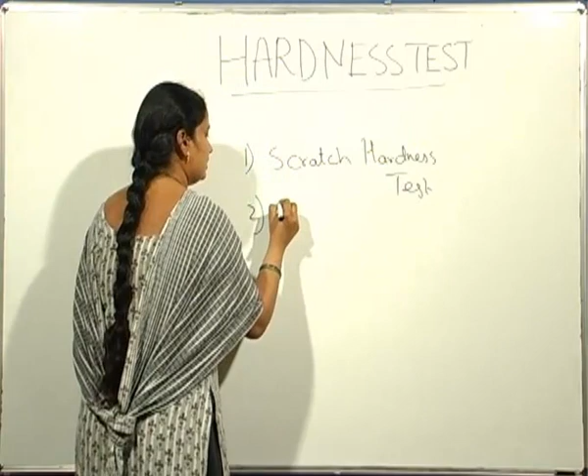Among these, there are three types of hardness measurements. The first is the oldest type, scratch hardness test. Second is rebound hardness test. Third is indentation hardness test, where an indenter having either a spherical shape, or in the form of a cone or pyramid, tries to indent on the surface of the material under the application of a known load.

The depth of the indentation or the dimensions of the indentation is measured, and that corresponds to the hardness. Various examples of indentation hardness tests are Brinell hardness, Rockwell hardness, Vickers hardness, etc.

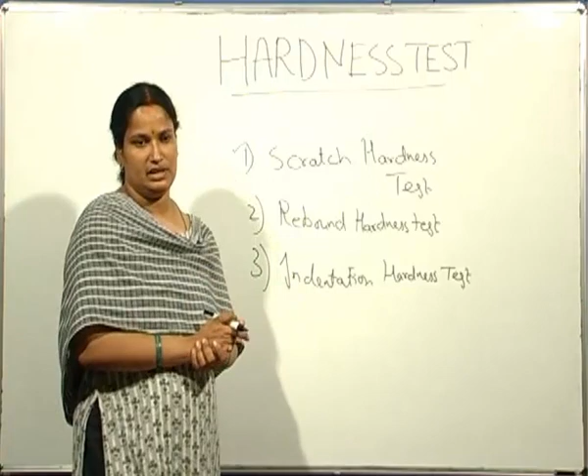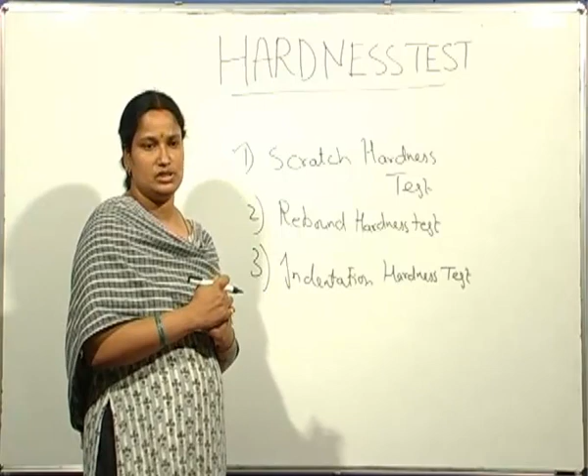Before going into detail on the various types of hardness, first we look into the oldest method of determining hardness, known as scratch hardness test. It is the ability of a material to scratch another material. If a material is very hard, it resists scratching; a softer material shows less resistance to scratching. This scratch hardness test is more useful for mineralogists compared to material scientists.

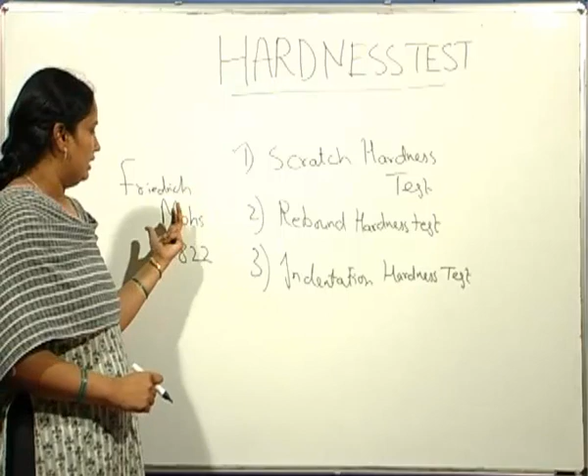This was first devised by a German mineralogist known as Friedrich Mohs, in the year 1822. He devised this scratch hardness test depending upon the ability of a material to scratch another material - a harder material scratches a softer material. Based on this, he devised a scale which has numbers from 1 to 10.

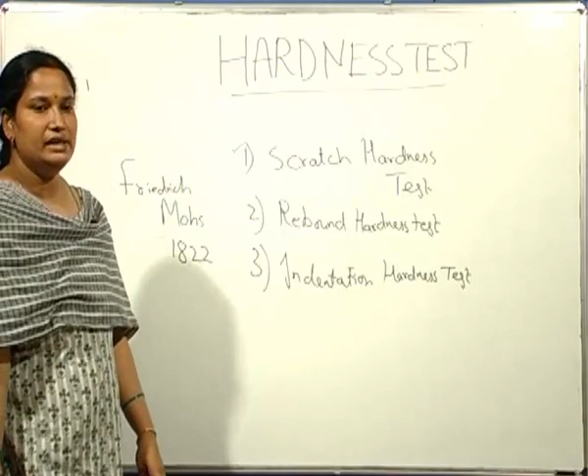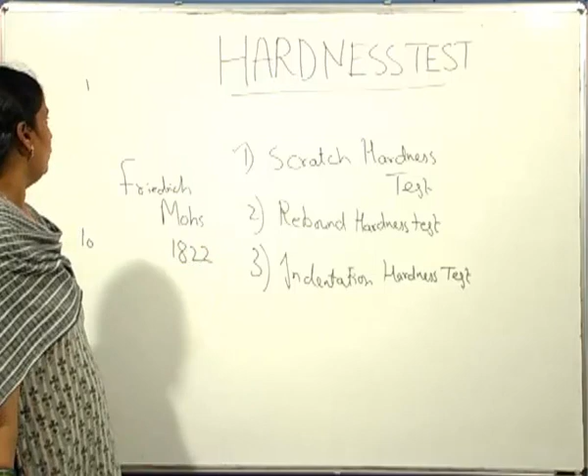The scale is indexed from 1 to 10. 1 stands for the soft materials, and it goes on increasing, and 10 is for the hard materials. So 1 stands for talc, 2 stands for gypsum, 3 calcite, 4 fluorite, 5 apatite, 6 feldspar, 7 quartz, 8 topaz, 9 corundum, and 10 diamond.

This is the hardest known material to man. These are the different ranks depending upon the ability to scratch another material. So the softest is talc, ranked 1, then 2 gypsum, 3 calcite, 4 fluorite, 5 apatite, 6 feldspar, 7 quartz, 8 topaz, 9 corundum, and 10 diamond. These are the various minerals placed in this scale depending upon the ability to scratch.

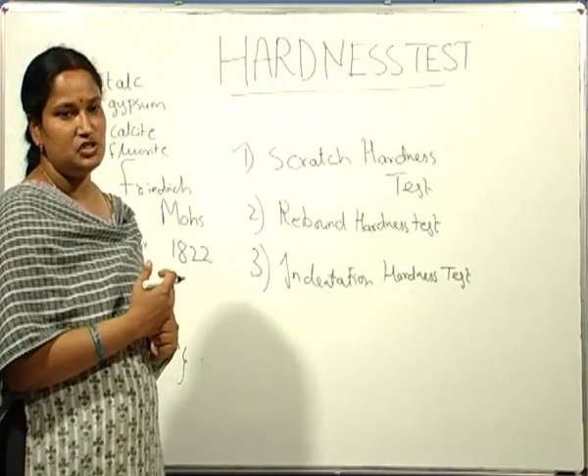But one disadvantage of this Mohs scale is that the intervals are not widely and equally spaced. For example, the interval between 9 to 10 is very high compared to 1 and 2. The gap between 9 and 10 is much wider when compared to 1 and 2. So for the case of metals, this is of limited usefulness, because it is more qualitative in nature, and the intervals are not equally and widely spaced.

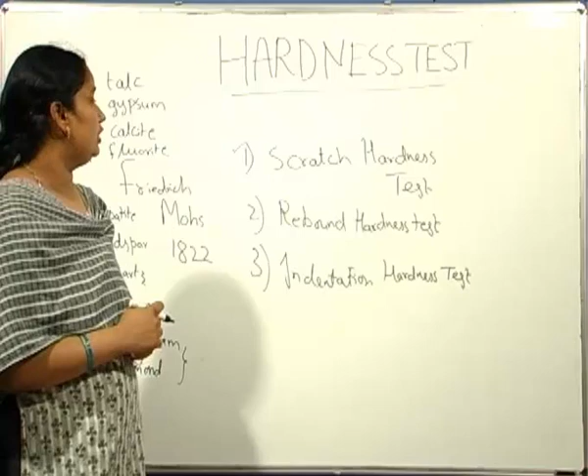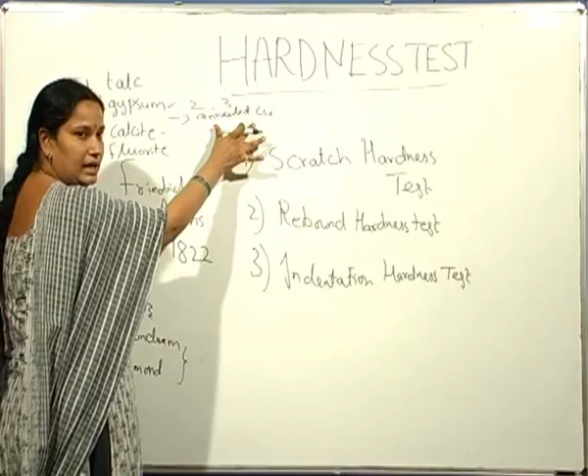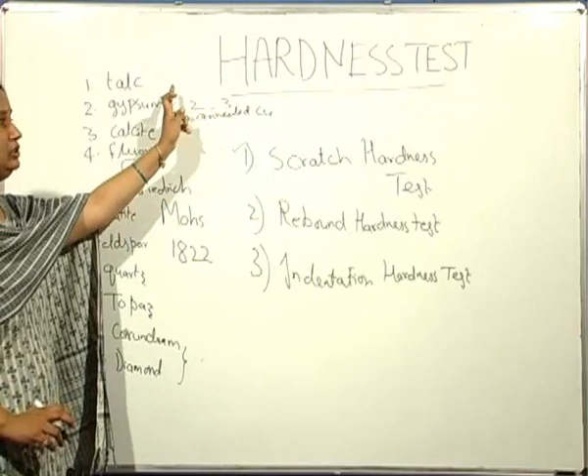For the case of annealed copper, it falls between 2 and 3. If a test material, say annealed copper, is able to scratch gypsum but unable to scratch calcite, it is placed between these 2 points, between 2 and 3. This indicates that the test material is able to scratch rank 2, that is gypsum, but unable to scratch rank 3, that is calcite. So it is placed between 2 points: the first point indicating that the test material is able to scratch that mineral, whereas it is unable to scratch the next mineral.

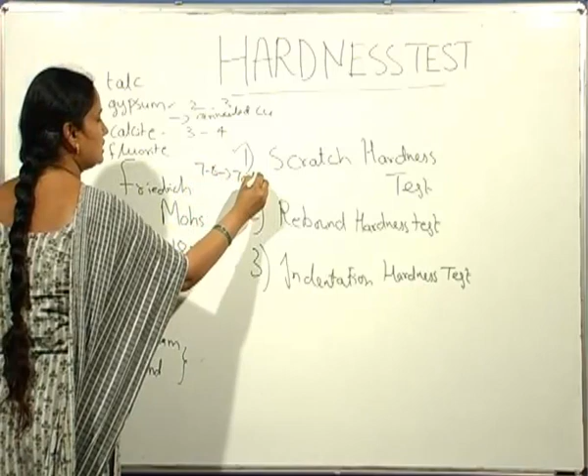For the case of iron with 0.1 weight% carbon, it falls between 3 and 4. For tool steel, it is between 7 and 8. So a material with the lowest rank cannot scratch a material with a higher rank. This means quartz cannot scratch topaz, because topaz is harder and of higher rank, whereas quartz can scratch feldspar. So this is how minerals are ranked in the Mohs scale depending upon the ability to scratch.

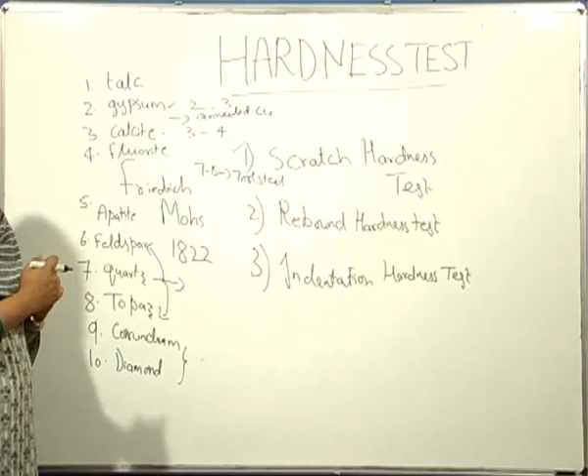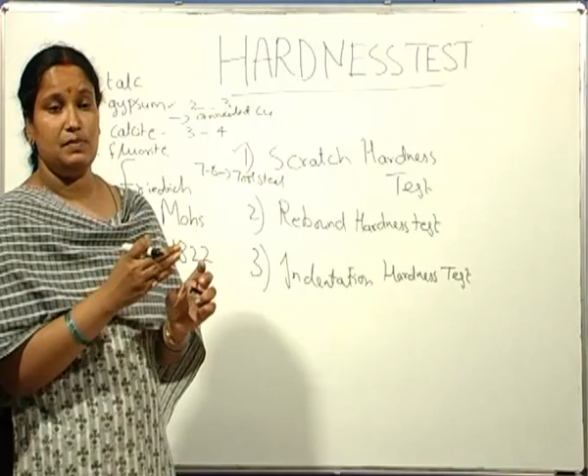This is known as the scratch hardness test. This test is not widely used for metals, but a form of this test is used for certain applications. For hardened steels, this is known as the file test. A file in a tempered condition has a certain hardness value. If this file scratches the test material, it means the test material is softer than the file. If the file is unable to scratch the test material, it means the test material is harder than the file. So this is used only for comparative purposes, only for comparison between materials. Moreover, this type of test method is more qualitative in nature.

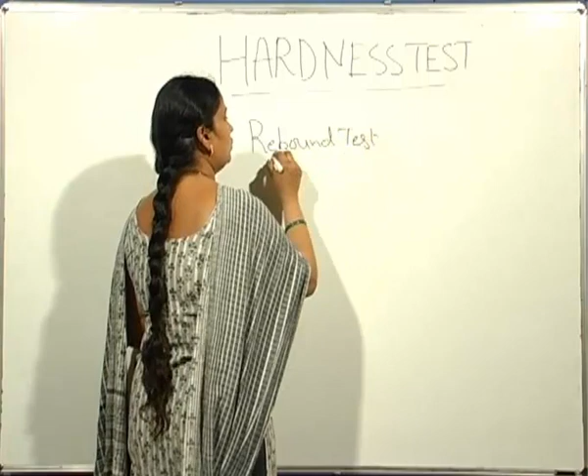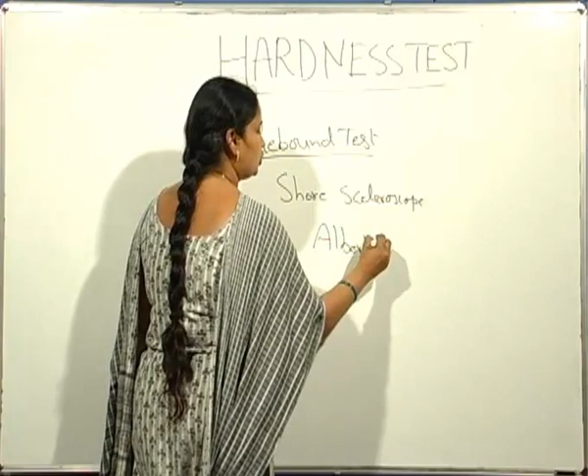The example of this rebound test is the Shore scleroscope, which was invented by a scientist known as Albert F. Shore in the year 1907. This is one of the hardness testing methods which uses the principle of elastic rebound, invented by Albert F. Shore in 1907.

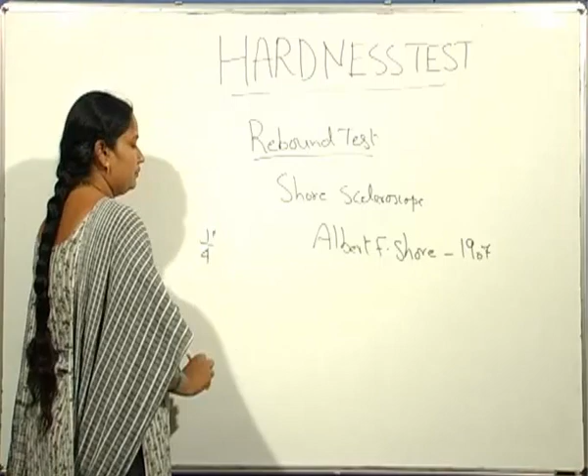This Shore scleroscope uses a diamond tip hammer enclosed in a glass tube. The diamond tip hammer has a diameter of 1/4 inch and a length of about 3/4 inch. The tip radius is about 0.01 inch. This diamond tip hammer, about 1/4 inch diameter and 3/4 inch length, is allowed to fall from a known height.

This hammer falls under its own weight onto the test specimen and rebounds to a height depending upon the hardness of the material. If the material is harder, the height of rebound is higher. If the material is softer, the height of rebound is less.

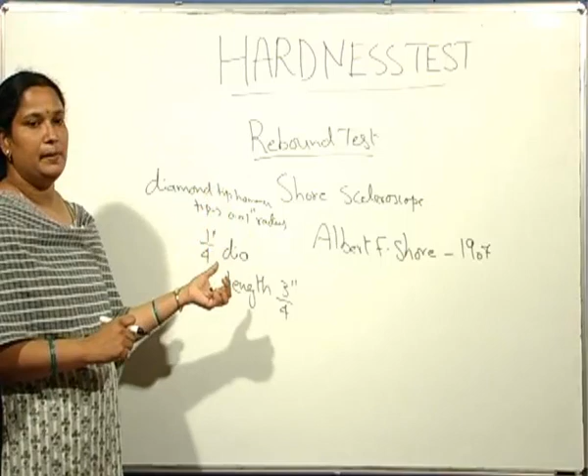This hardness can be determined by means of a scale which is graduated from 0 to 100. The height of rebound is read from the scale as the hardness of the material.

The main application of this Shore scleroscope is that it does not give any impression or mark on the specimen. So for certain applications where impressions or marks cannot be tolerated, this test can be used.

This test is also used to determine the hardness of material which is very large, for large forgings, as well as when a number of quality checks are to be conducted on large samples. One uses this Shore scleroscope test because it is a very rapid way of determining hardness, and it can be used even for very large size specimens and for a number of specimens.

But the hardness cannot be determined from only one rebound; one cannot determine the hardness of the material from a single reading. A number of measurements have to be conducted, with rebounds not on the same place where the hammer strikes the specimen. Once the hammer strikes the sample surface, the material is tested again at the next surface, and the average of these hardness values is taken to get accurate test results.

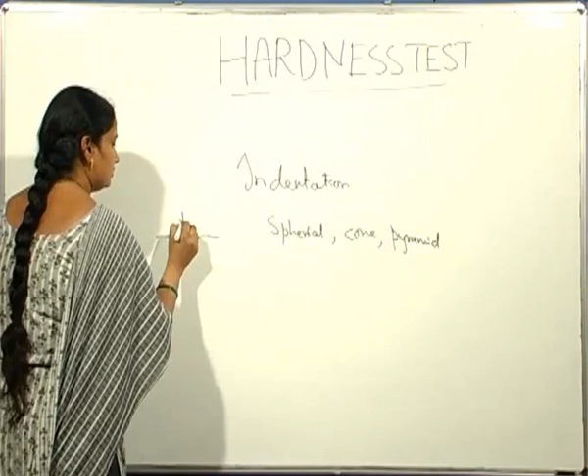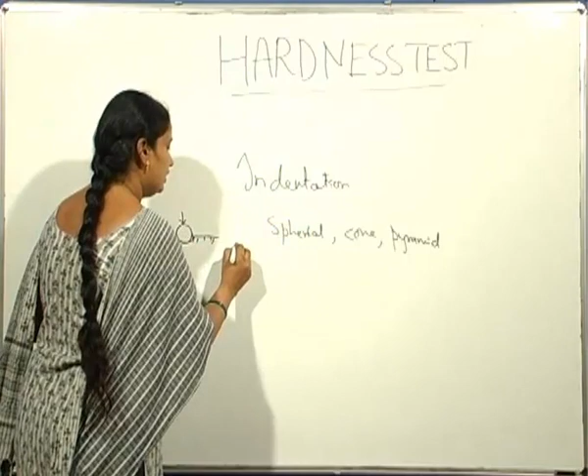This indenter is forced under the application of a known constant load onto the surface of the specimen, making an impression or indentation on the surface. Hardness is determined by the formula: hardness equals load divided by the surface area of indentation or depth of indentation.

In the case of indentation hardness methods, either a spherical, conical, or pyramid shaped indenter is used. This indenter is allowed to indent on the surface of the specimen under a known constant load.

After equilibrium is established, the indenter and load are withdrawn and the dimensions of the indentation are measured. Some hardness tests determine the area of indentation, and some determine the depth of indentation.

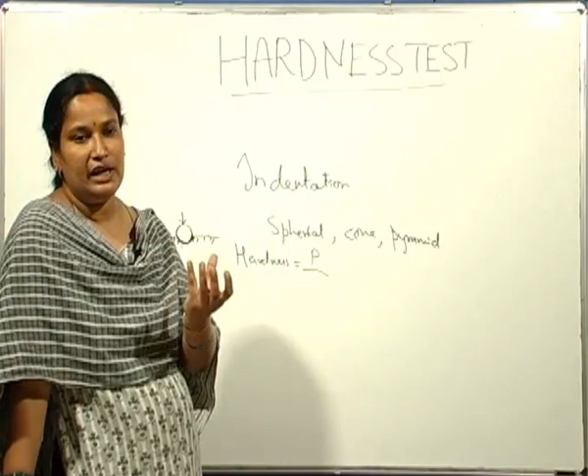In the case of the Rockwell hardness test, it measures the depth of indentation, whereas in the case of Brinell and Vickers, they determine the surface area of the indentation. This is the basic principle of indentation type hardness.

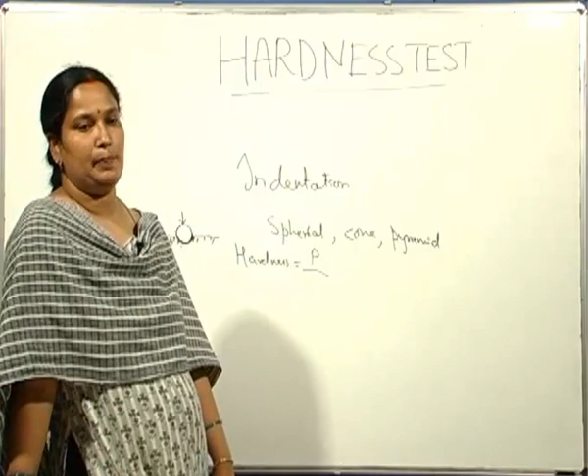The examples of indentation type hardness are Brinell, Vickers, and Rockwell. These are some of the well-established indentation methods to determine the hardness of a material.

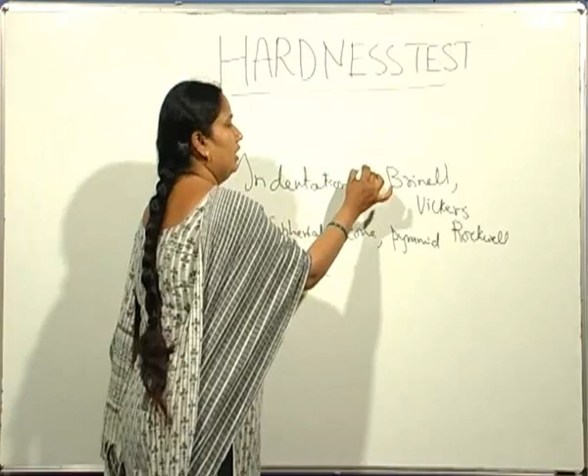Now we shall first see about the Brinell hardness test, which was invented by J.A. Brinell in the year 1900. This Brinell hardness test uses a spherical indenter of diameter 10 mm, a hardened steel ball used as the indenter.

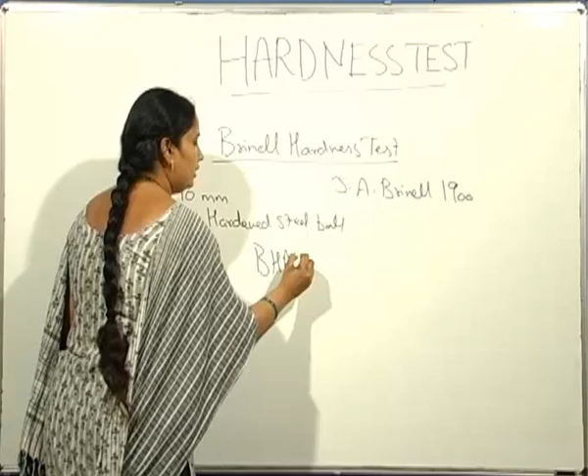This hardened steel ball, under the application of load, indents or makes an impression on the surface of the specimen. Once equilibrium is established, the load and indenter are withdrawn, and the dimensions of the indentation are measured. The Brinell hardness number is given by load divided by the surface area of indentation.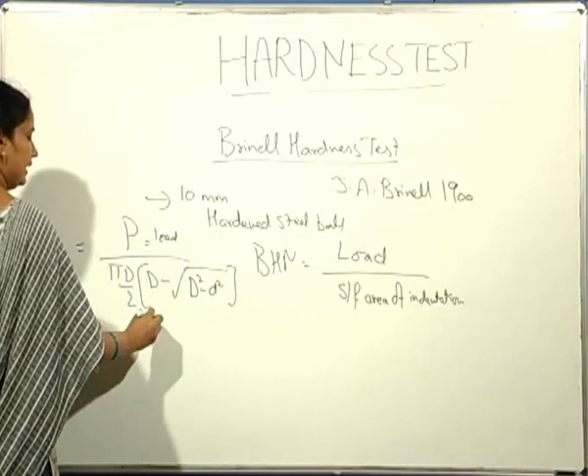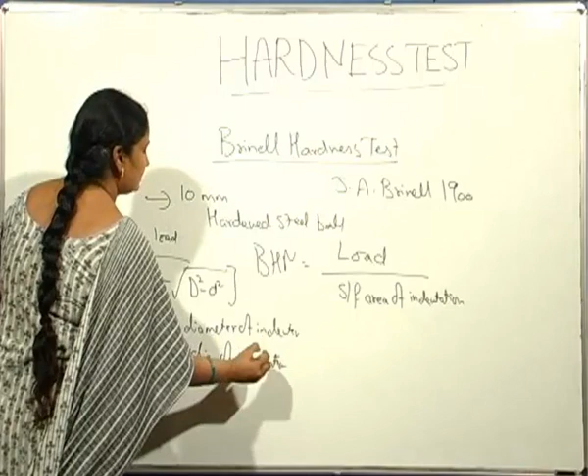Surface area of indentation is given by the formula P divided by pi d by 2 into capital D minus root over D square minus small d square, where P is the load in kgs, capital D is the diameter of indenter, known as 10 mm, and small d is the diameter of indentation. So Brinell hardness has the units of kg per mm square.

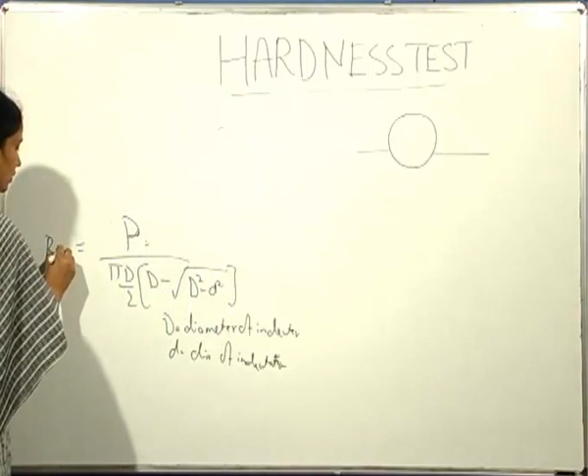In order to derive the formula for Brinell hardness number, which is load divided by the surface area of indentation, BHN equals P divided by pi d by 2 into capital D minus root over D square minus small d square, we consider this figure. This is the diameter of indentation, small d, and this is the diameter of indenter, capital D, this is of height h, and this distance is x.

According to the formula, Brinell hardness number equals load divided by the surface area of indentation, given by pi d h. The surface area of indentation is pi d into h, where h is the depth.

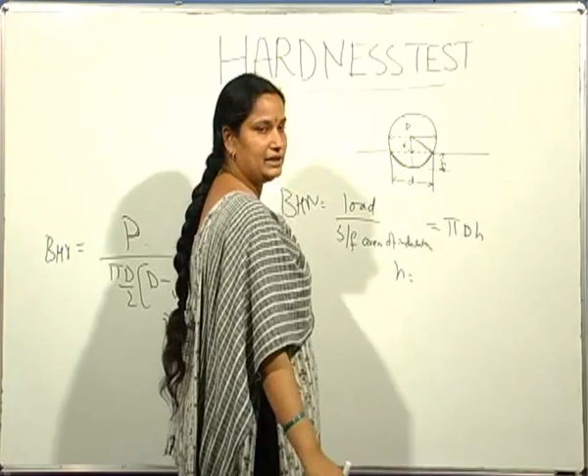So h can be written from this figure. H is equal to capital D by 2 minus x. So h is equal to, from the figure, capital D by 2 minus x equals h.

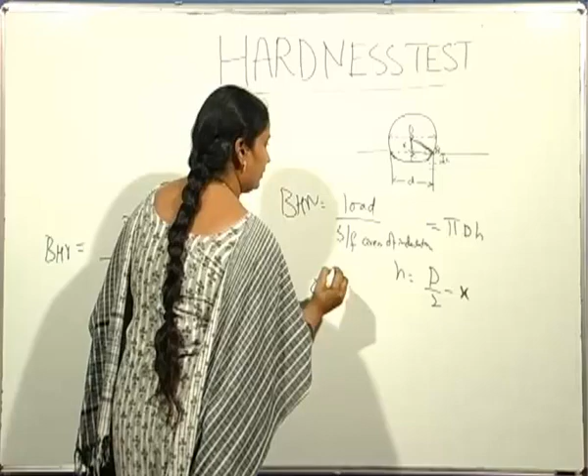By considering this right angle triangle OCB, we have x square plus, this is small d by 2, x square plus d by 2 square is equal to capital D by 2 square. From this, it can be written that x is equal to root over D square minus small d square, by 2.

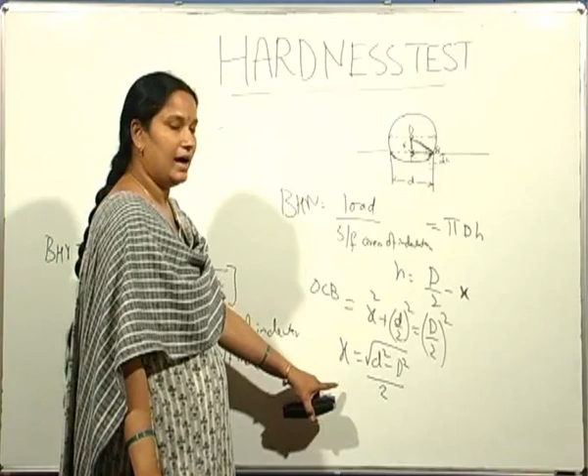This is x. Now substitute the value of x in equation 1. So h is equal to capital D by 2 minus x. X is root over capital D square minus small d square, by 2. This is h. So the surface area of indentation is pi d into h.

So the surface area of indentation, pi d into h, is equal to D by 2 minus root over D square minus small d square, by 2. This can be written as pi d by 2 into D minus root over D square minus small d square. So this is the surface area of indentation.

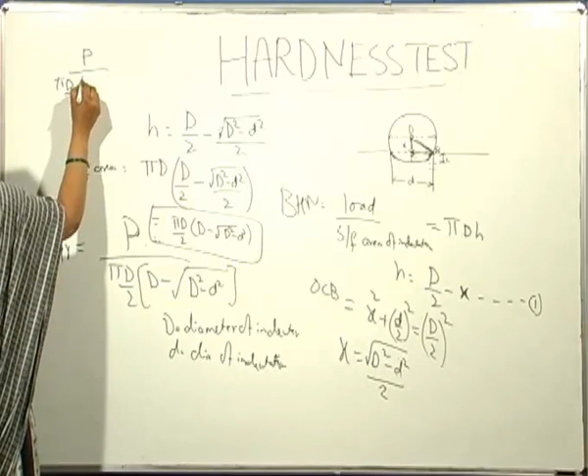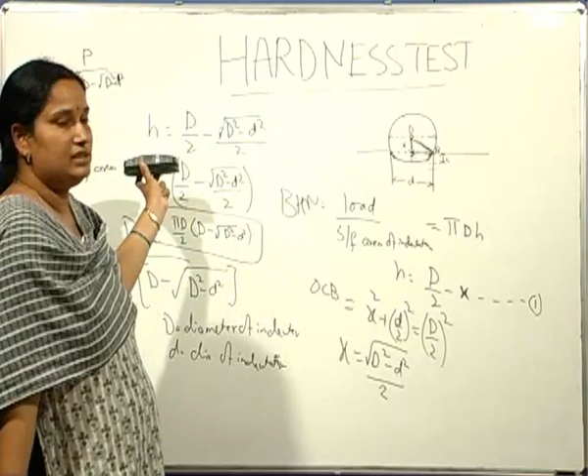So Brinell hardness number is load, P, divided by the surface area of indentation, given from this formula, pi d by 2 into D minus root over capital D square minus small d square. So this is the expression, and this is how we derive the formula for Brinell hardness number, that is, load divided by surface area of indentation. This is how we arrive at this expression.

But there is one small complication in Brinell hardness number: it does not take into account the mean pressure or average pressure between the indenter and the material. So this does not give correct values, because it considers the surface area, the concave area, of the indentation, and by considering this surface area, the average pressure is not taken into consideration.

So a better way of determining hardness is load divided by the projected area of indentation, which takes into consideration the mean pressure between the indenter and the material. This is given by Meyer. Meyer states that the mean pressure between the indenter and the material is given by load divided by the projected area of indentation, not the surface area of indentation.

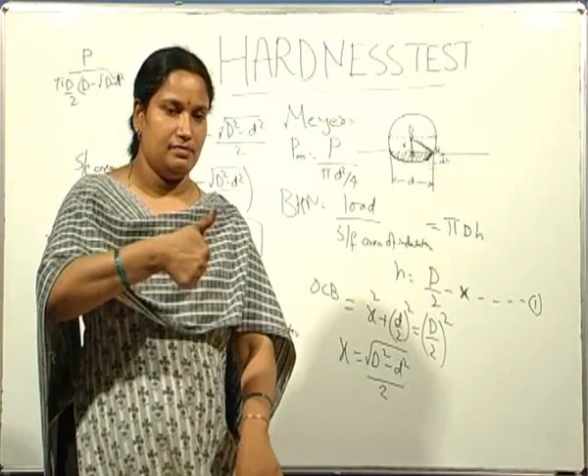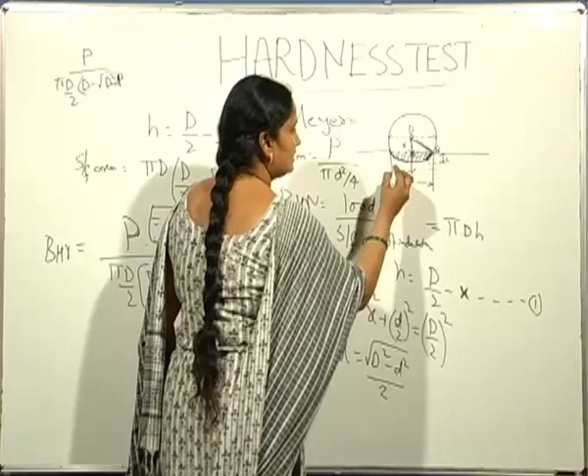Average pressure between the material and indenter means, suppose if you press on your hand with the thumb, the pressure felt at the center is greater than at the edges. So in considering the pressure, one has to take the average pressure. By considering the surface area of indentation, this has not been taken into consideration.

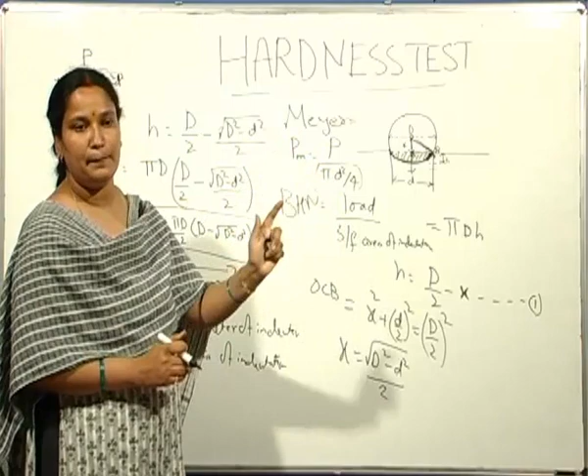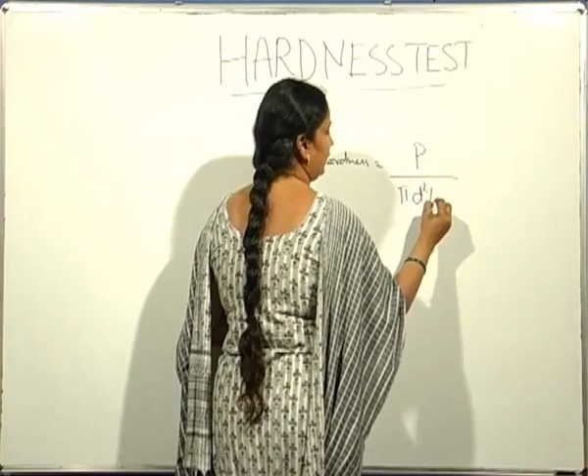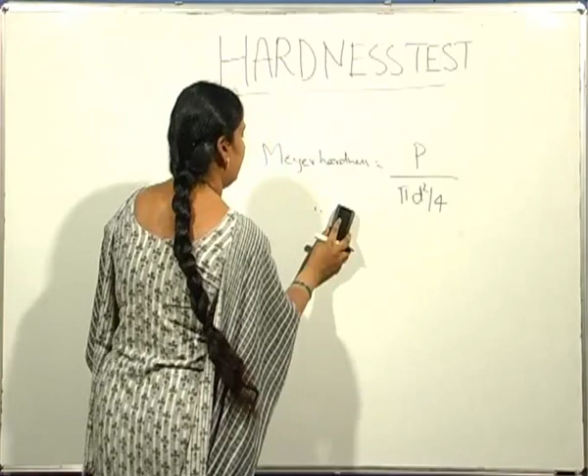Thereby, a better way of defining hardness, given by Meyer, is load divided by the projected area of indentation, that is pi d square by 4, which takes into account the average or mean pressure between the indenter and the material. So according to Meyer, hardness is load divided by the projected area of indentation, pi d square by 4. Meyer has shown a relationship between the load P and the diameter of indentation: P is equal to C d to the power of n. This is known as Meyer's law.

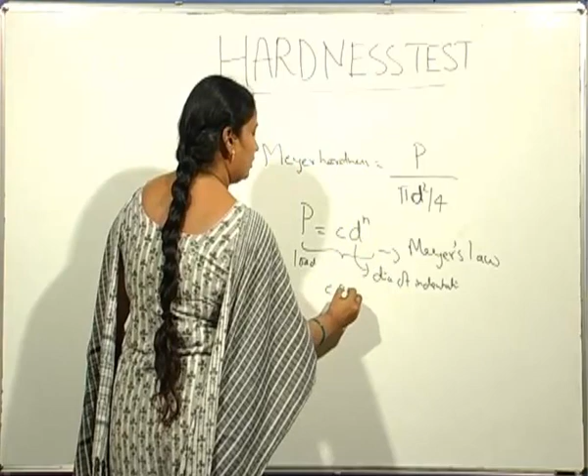This is known as Meyer's law, which shows the relationship between load and diameter of indentation, where C and N are constants for a material. P is equal to C into d to the power of n.

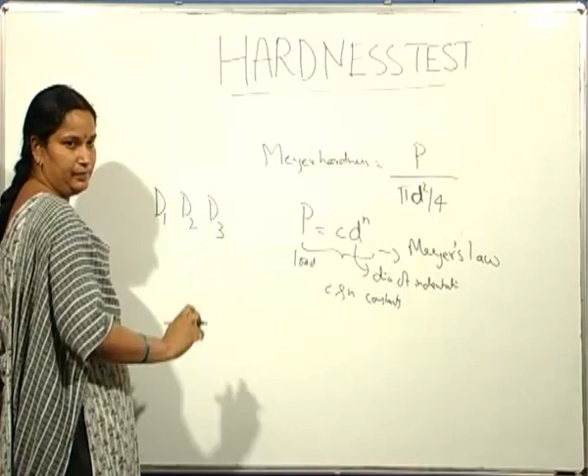So according to Meyer, for indenters of diameters d1, d2, d3, having different diameters, the indentations produced by these indenters for the same load are d1, d2, d3. Then this law can be written as P equals C1 d1 to the power of n1, equals C2 d2 to the power of n2, and so on, according to Meyer.

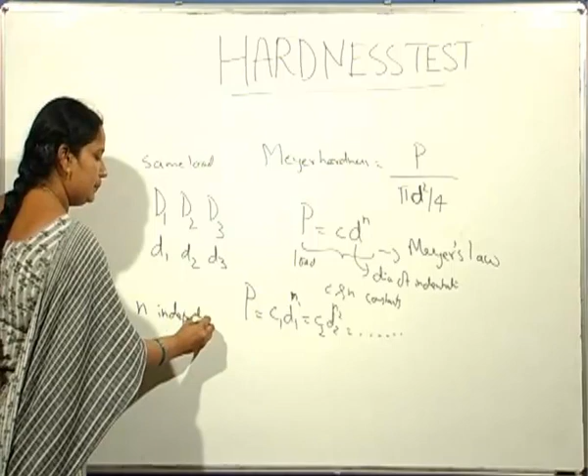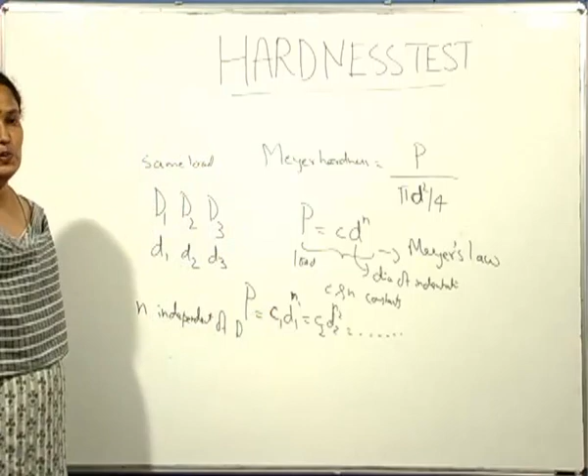So Meyer has found experimentally that n does not depend upon the indenter. The constant n is independent of the diameter of the indenter, capital D. But C and D are inversely related.

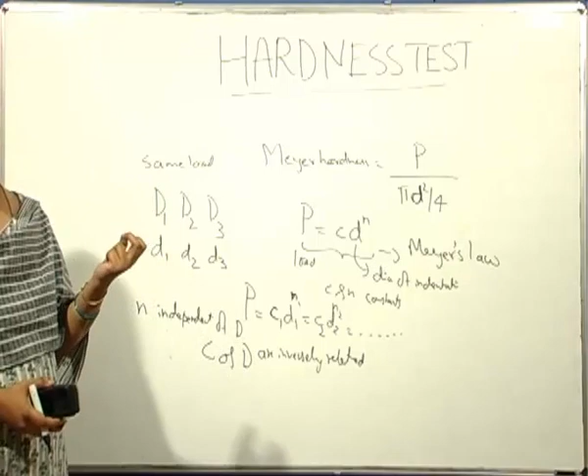So this is according to Meyer's hardness, which has taken into consideration the mean or average pressure between the indenter and the material. It is given by load divided by the projected area of indentation. Meyer's law gives the relationship between load and diameter of indentation.

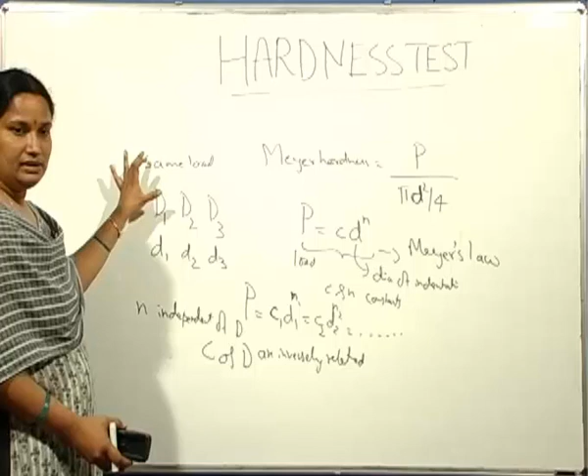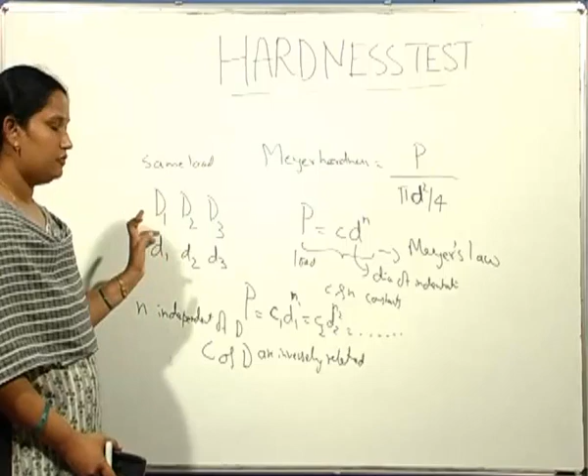P is C D to the power of N, where C and N are material constants. P equals C1 D1 — that means when using different indenters of different diameters under the same load, the diameters of indentations produced are D1, D2, D3. So it can be written in this form, where N is independent of the diameter of indenter, and C and D are inversely related.

So we can write A is equal to C D to the power of N minus 2, where A is constant. That is, C1 D1 to the power of N minus 2 equals C2 D2 to the power of N minus 2 equals C3 D3 to the power of N minus 2, and so on.

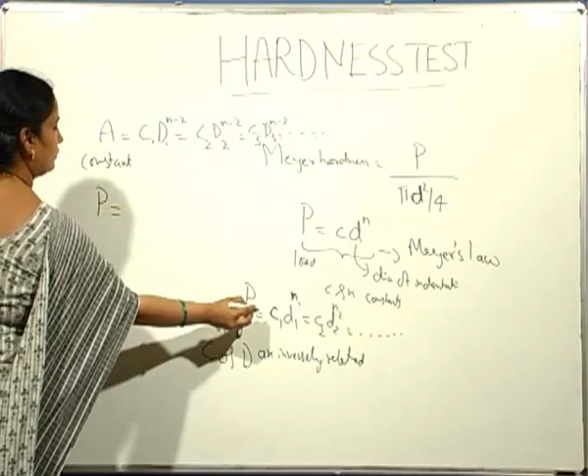So from this we can write this equation as P equals A D1 to the power of N divided by capital D1 to the power of N minus 2. So instead of C, we substitute A, where C is equal to A by D to the power of N minus 2. So this is one of the important relationships.

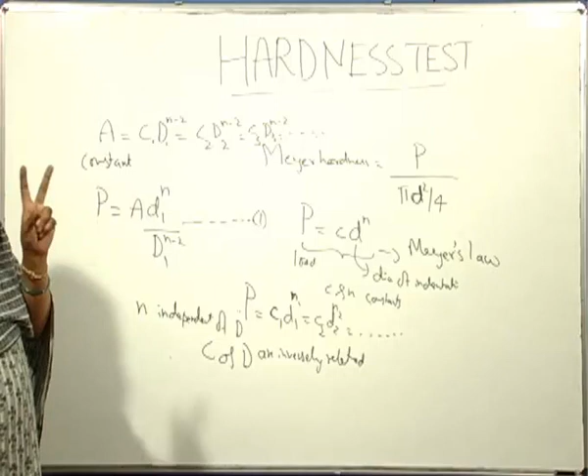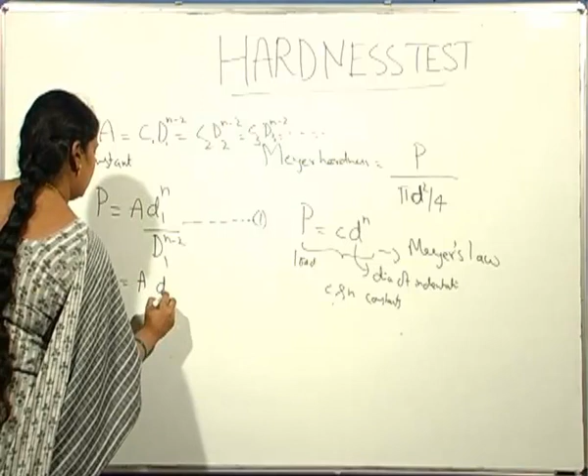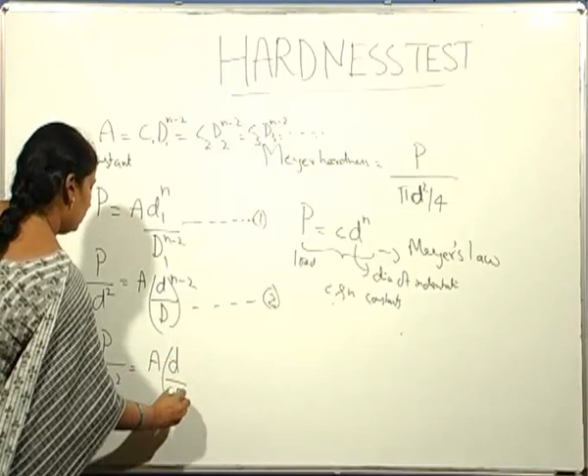This equation results in two very useful and important equations: P by D square is equal to A into D by capital D, whole to the power of N minus 2 — this is the first useful relationship. The second one is P by capital D square is equal to A into small d by capital D, whole to the power of N. These are the two important, useful relationships obtained from this equation.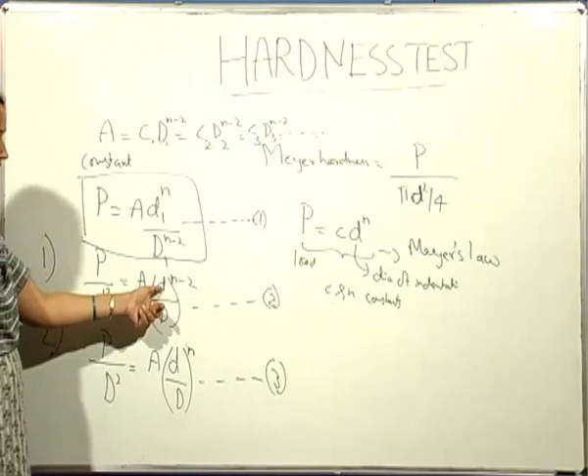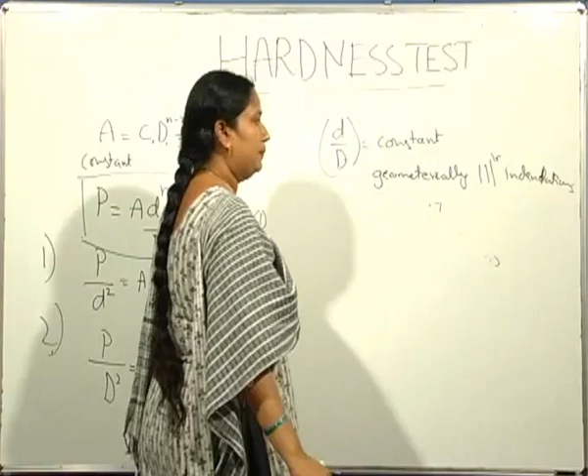So from this it can be understood that maintaining small d by capital D constant means these are geometrically similar indentations. By obtaining geometrically similar indentations, P by small d square is constant.

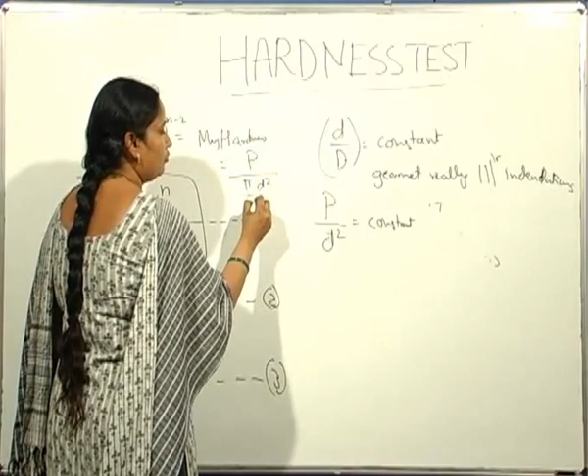From that equation, it is clearly understood that P by D square is related to Meyer's law, where Meyer's hardness is given as load divided by the projected area of indentation, that is pi d square by 4. So P by D square being constant means it is related to Meyer's law. This Meyer hardness value is constant for geometrically similar indentations.

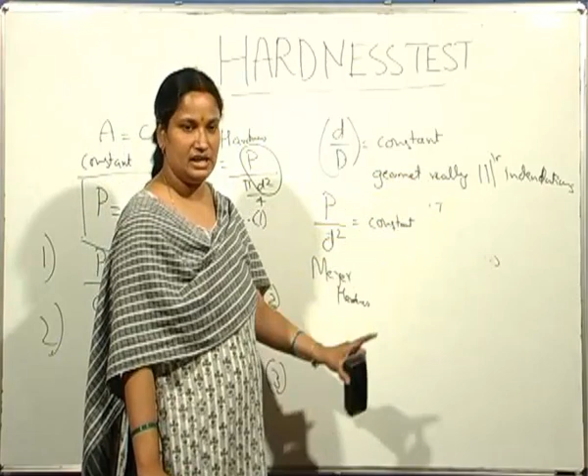It means that these hardness values do not vary with load for the same material. If for the same material one can produce geometrically similar indentations, then the hardness does not change with load. This is given from this equation. By maintaining geometrically similar indentation, that is small d by capital D constant, it means that Meyer's law is constant, it does not change with load. Meyer's hardness is constant. This is from the first equation.

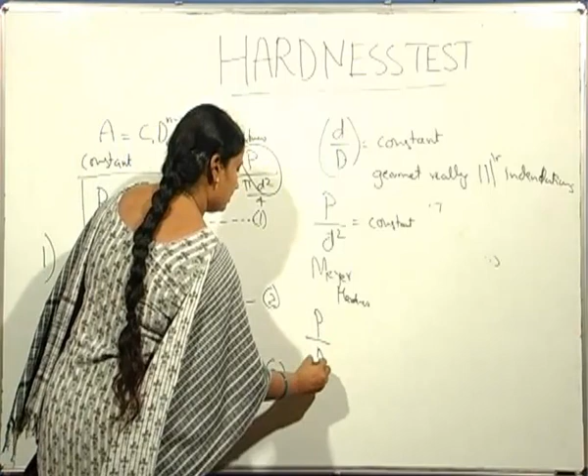From the second equation, P by D square is equal to small d by capital D whole to the power of n into A, where A is constant.

For different loads and for different diameter of indenters, one can obtain the same hardness value if the small d by capital D is constant. That is, for the case of geometrically similar indentations, one can achieve the same hardness values if the load or the diameter of the indenter is varied. So this can be achieved practically.

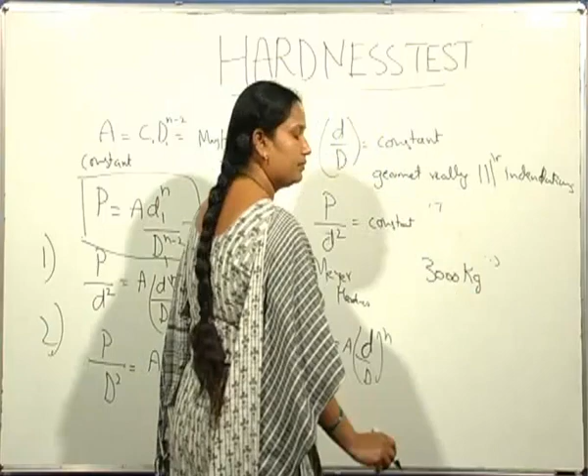I'll give you one example. For the case of Brinell hardness test, if a load of 3000 kg is used and the diameter of indenter is 10, P by D square, according to this equation, is 3000 by 10 into 10 which is equal to 30. So by maintaining P by D square equal to constant, even though one uses a non-standard load different from the standard value, or a non-standard indenter with a different diameter than 10, one can obtain the same hardness value by maintaining this ratio as constant.

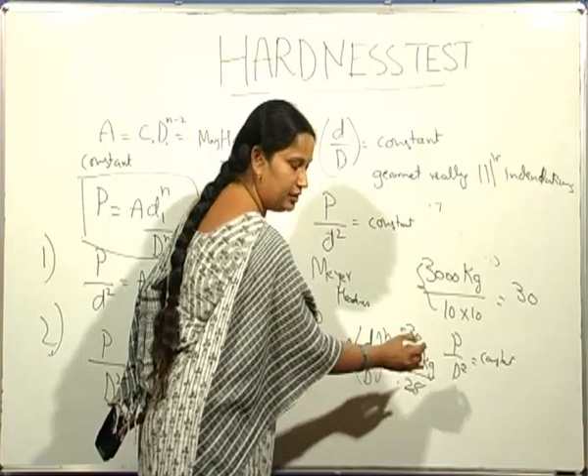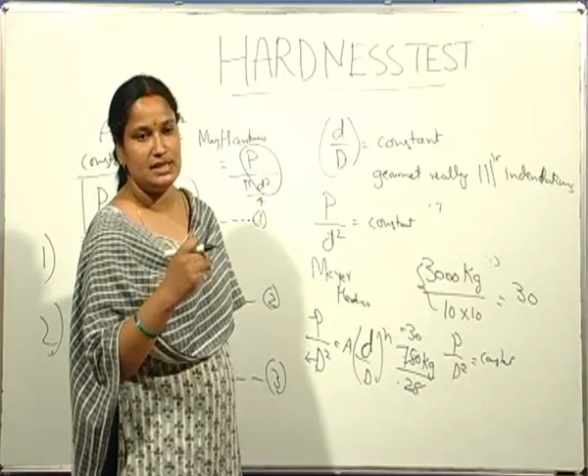P by D square maintained constant means the pressure on the indenter is maintained constant. So in order to obtain the same hardness value for a different load, that is 750 kg load, the indenter diameter should be 5, that is 5 into 5, 25, again it results in the constant, that is 30. So P by D square is constant. The same thing is maintained here, but for different load and different diameter of indenter. So by maintaining this ratio constant, even with a non-standard load and different diameter of indenter, one can obtain the same hardness value for the same material. So this is the significance of these two equations.

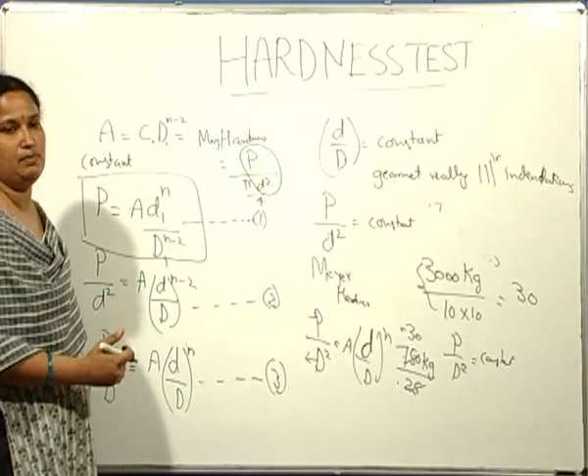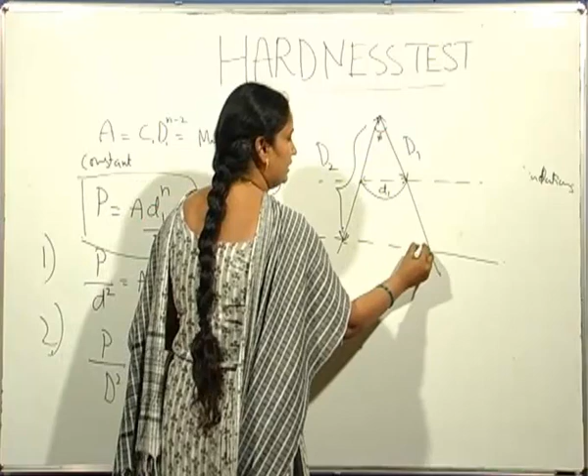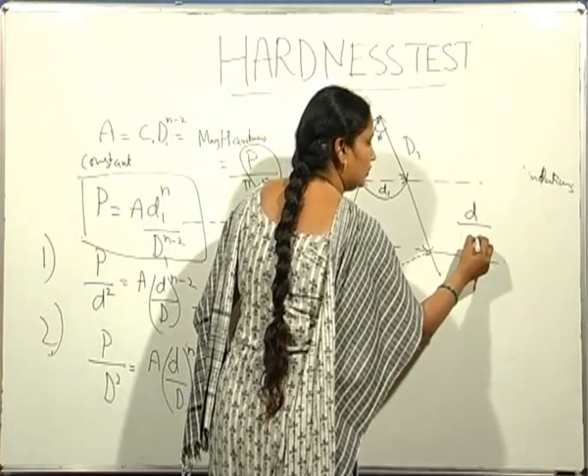Now I shall discuss what is meant by geometrically similar indentations. Geometrically similar indentations means the indentation does not change its shape when the load is different or when the diameter of indenter is different. This you can clearly understand by looking at this figure. By maintaining this angle phi, and this is the diameter of indentation small d, and this is the diameter of the indenter d1. So this is the indentation that is produced, and this is the diameter of the second indenter d2, and the corresponding indentation small d2. So by maintaining this angle constant and similar, the ratio of this indentation to the indenter similar, one can achieve geometrically similar indentations.

So by maintaining this geometrically similar indentation, one can obtain the same hardness values for a material even though the load is varying or the diameter of the indenter is varying. That is, P by D square is constant. It means by maintaining this small d by capital D as constant. So this is the important observation that is made, and this is given by Meyer.

Even though Meyer hardness gives the correct accurate hardness values when compared to Brinell, the practical usefulness of Meyer is very limited. This Brinell hardness is more widely accepted and its practical usefulness is more when compared to Meyer. So as long as the ratio P by D square is maintained constant,

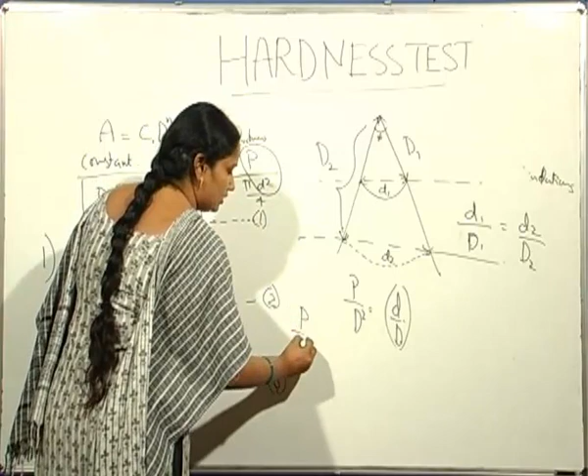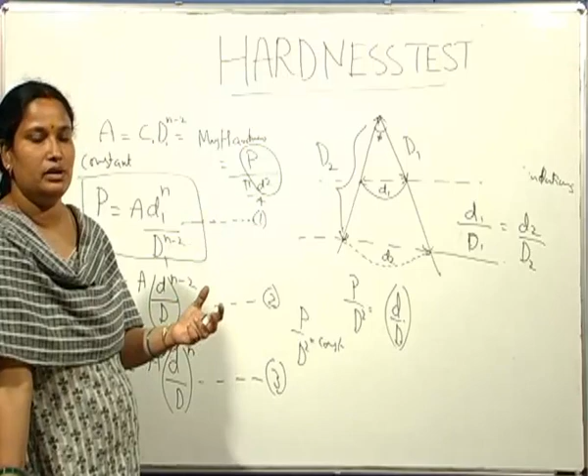geometrically similar indentations are obtained and the hardness does not depend upon load, it does not vary with load. It is found that for the case of cold worked metals, Meyer hardness is independent of load, whereas the Brinell hardness is found to be constant at low loads, but as the load increases, the hardness value decreases, which incorrectly shows that as the load is increased, the material undergoes softening.

And for the case of annealed metals, from Meyer's law, it is seen that with increase in load, the hardness values increase, indicating that the material undergoes strain hardening. Whereas for the case of Brinell, it shows that for annealed metals, the hardness values first increase and then decrease, indicating material softening. Again, this is incorrect.